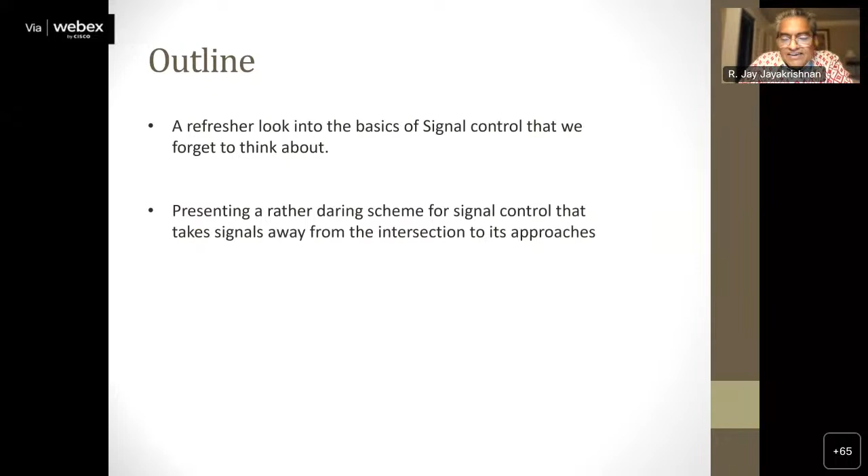Okay, outline. What I wanted to do in this talk was to keep it technical but qualitatively technical. I'm not planning to give too much of quantitative items, formulas, and all of that. In fact, I'll throw some slides at the end, which are slides from Pengyuan, because that's hard work from him. But the ideas behind this is what I am hoping to present.

So basically, I wanted to take a look at how we are doing traffic signal control, how we have been doing it for the past century, and should we actually even change our thinking when it comes to the future, especially knowing that there will be better technology available. In fact, better technology is already available. We have autonomous vehicles as a possibility, even though nobody expects autonomous vehicles will be prevalent on our streets for at least another couple of decades, if not more.

But signal control can be changed with existing technology and some of the technology that is becoming available. Then additional thoughts came to mind. Most of this started when Pengyuan was starting his PhD work, and he was looking at traffic smoothing, green driving, basically bringing vehicles to intersections. And then as he was putting a proposal together, we were having a phone conversation. It was literally a phone conversation during COVID times.

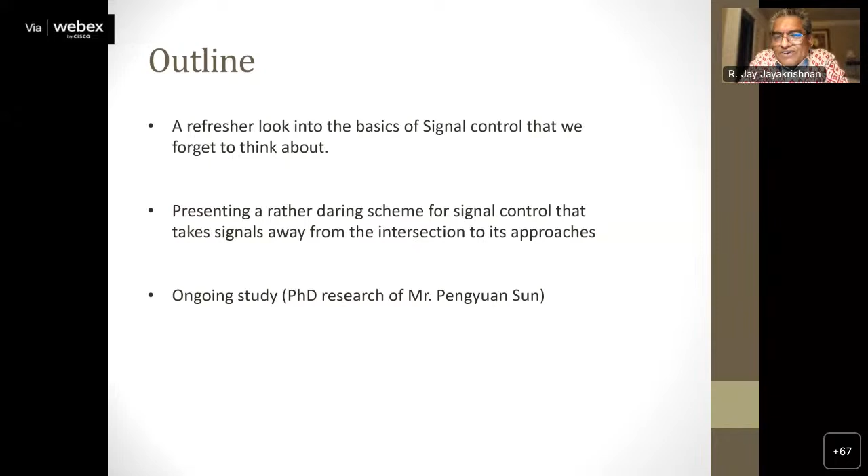And then this idea just struck that, hey, why do we even think of having signals anymore at the intersections? I mean, where should we place these signals? And that's where the research went. Then that kind of forced me to look back at how traffic signal control has evolved and how our thinking has been. So if we go back to the history of traffic control, it was 1868 when they first tried traffic signals in London, and it was a semaphore system.

I'm not sure if all of you remember the semaphore arms that we have on railway tracks. They used to have that. You can actually see the picture where they had these arms that were set up as traffic signals. The first electric signal, of course, came after the electric bulb got invented. The first electric traffic signal was developed by Lester Wire at Salt Lake City, Utah.

And then by 1935, the USA had the first Manual on Uniform Traffic Control Devices. Interestingly, that book's title has not changed even now. It is still the MUTCD that the US has. Of course, it's been updated so many times.

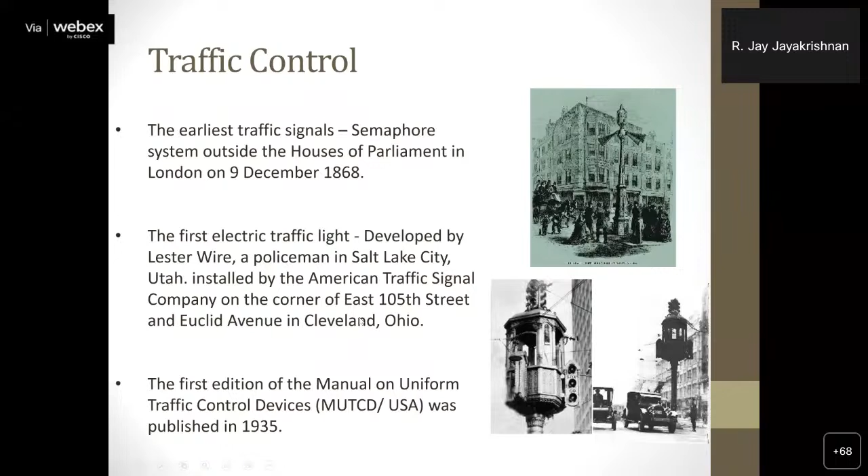You can see some of the earliest traffic control. There was even a little bird cage kind of thing, where a policeman would actually sit inside that little bird cage. And because it was developed by Lester Wire, it used to be called a bird on a wire, or something like that. I don't remember.

And this is 1868 when London first started traffic control. It had some gas lights, etc. They had some big fires and problems of that kind. But you can see the signal: caution, all persons in charge of vehicles and horses are warned to pass the crossing with care. So we've been doing this for quite a long time, 150 plus years.

So what have we been doing? Basically, we have red signals and green signals at intersections, as all of you know. Many of you would have designed them, and almost all of you would have studied it, so I'll just remind you of your class notes. What happens at a traffic signal? We do not allow traffic streams with crossing conflicts to move. That has been our thinking always. We won't let crossing movements happen at an intersection.

Now, you may have seen computer scientists a few years ago doing autonomous vehicle simulations, showing that vehicles can just go through. But they were basically using schemes like random path finding that robots would do, not an optimized scheme where engineers could say, this is how we will design it.

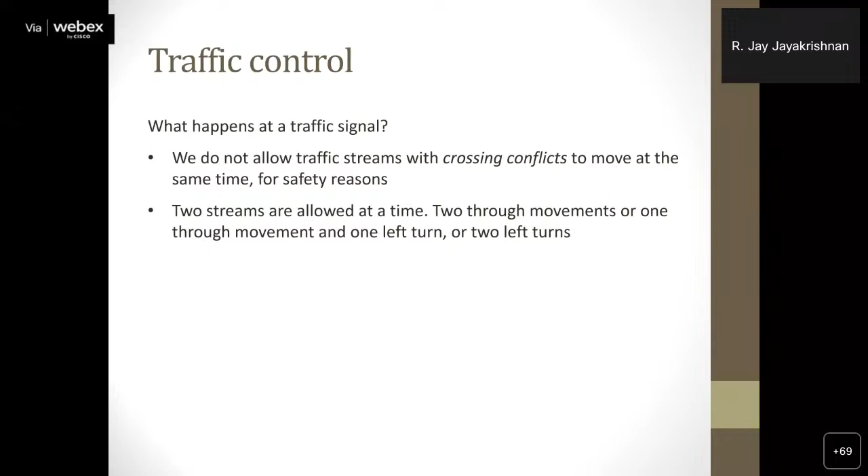Two streams are allowed at a time, two through movements, or one through movement and one left turn. In India, it will be one right turn or two right turns in an 8-phase ring diagram. So some merging flows, right turns in the US or left turns in India, are allowed unless otherwise specified for congestion reasons, not for safety reasons. That is the well-known RTOR in right-hand driving countries, and LTOR, left turn on red, in India. I don't think it is used a whole lot in India, but it's there.

How safe are merging or car following movements in comparison to crossing movements? This is a question that came to mind. We have always lived with the thinking that we can merge without accidents. We have expressways everywhere now, or freeways in the US. Vehicles are coming at 60 miles per hour, 100 or 120 kilometers per hour, and there's an entry ramp, and people easily merge into gaps of probably no more than 3 or 4 car lengths. We never bothered to be scared about that.

Why are we so scared about crossing movements? That is where my thinking went. So we will revisit this question. And one other thing to keep in mind: all of us who have learned driving are constantly keeping safety in car following. We do this constantly, every split second.

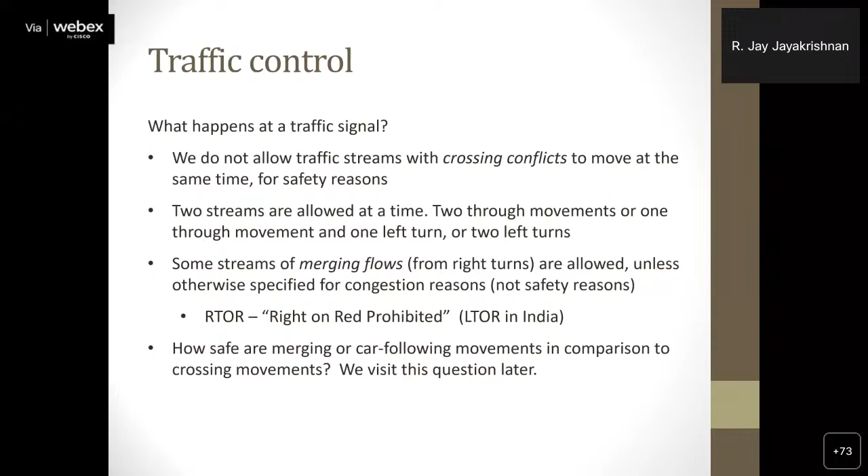This may not be a problem in India. In fact, we see on our national highways that we do know how to cross into traffic. It's not an impossible maneuver. I think human beings can do this, and that's where the thinking went. Let's just step back. What happens at a traffic control?

So it's class notes that all of you would have seen. This was from a talk that I gave to the students. So I borrowed the notes from my colleague, Professor Wenlong Jin, who I consider the foremost expert in traffic flow theory in the world itself. That's just what I have always thought about him. These are just his lecture notes. I used to teach this class, and many of you teach traffic engineering, and many of you have taken the courses, so you would all know this.

There is a queue that forms whenever there is a red light. There's a green phase at the light. There's a red phase, and if you just think about a straight deterministic queue, there's an arrival curve, and then there's a departure curve. The departure curve gets stopped during the red time, so it becomes flat, and then you get the saturation flow. Then they leave. Now the area in between these two curves is the total queue delay that is caused at an intersection. This is well known, right?

So you would have all seen these equations, and I'm sure you know the delay formula that is given there, the well-known Webster's delay equation. And the problem is that when we have all learned traffic engineering, we look at these formulas and we don't really think too much about it. It's like, oh, there was that complicated formula that Webster came up with. There's really nothing too complicated about it. The first term is pretty much what applies for most purposes. The second term is showing the extra delay due to randomness.

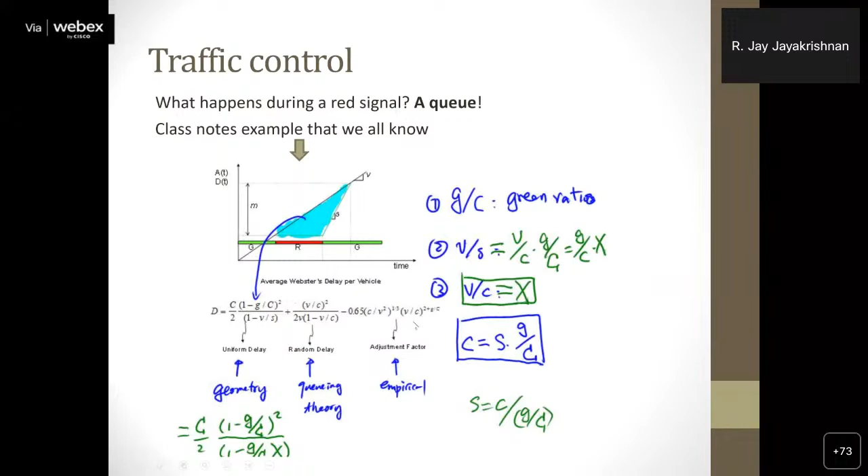If you look at traffic signal settings around the world, and I apologize to the country where I am in, it was mostly taught from the US to all the countries around the world, particularly Asia. Almost everybody seemed to have learned it from the US and UK. And somehow we have never been told that long signal cycles are a bad thing. And we always give the reason that, oh, it is all for pedestrians. That's almost like a convenient excuse.

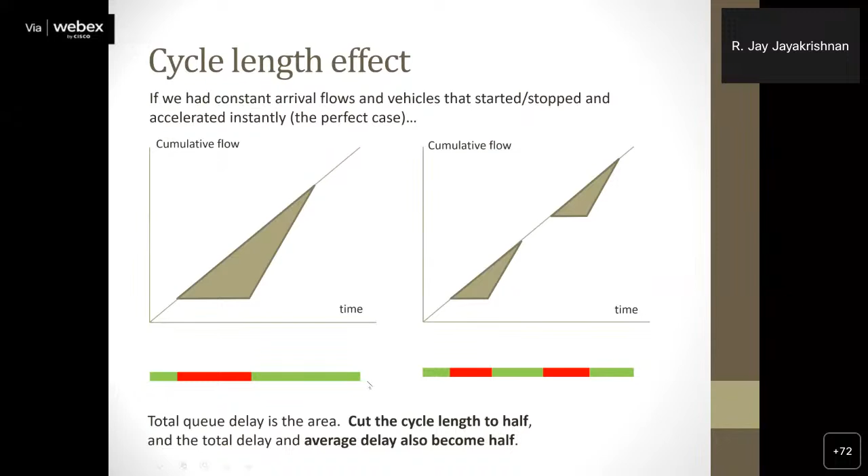But for pedestrians, yeah, we have to give that. No, pedestrians can wait a bit too. You can do it a few cycles at a time. The reason why I say that is because if you are keeping these long cycles, you're basically causing much longer queues than you really need to. So you need to think about it. This has not been much appreciated.

India is not too bad, by the way, in this. When I drive through Kerala, I actually don't see signal cycles which are that terrible. But you know, you go to other places in Asia, try Bangkok or try Seoul. These are all places where you'll see like 4-minute type of cycles. "What are you doing?" is what you would think.

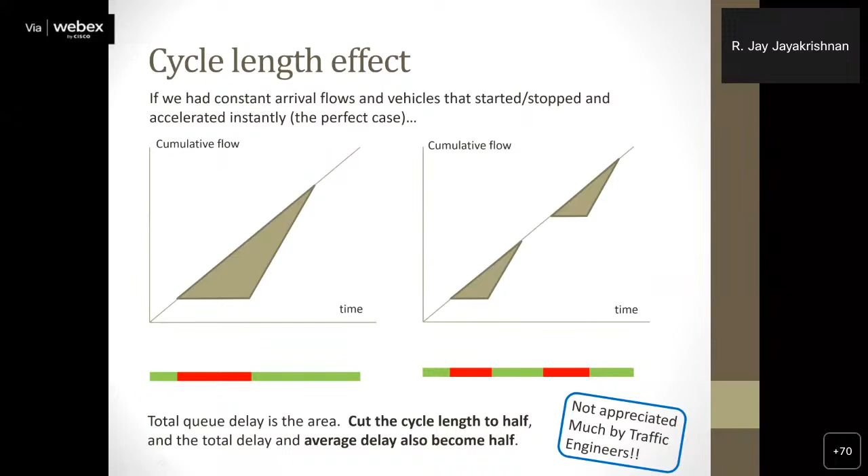In fact, all of those queues are caused by those cycle lengths, nothing else, which is, when you think about it, something we should actually appreciate a little bit more. We need to try to cut the length of our cycles. That's one of the basic points that I wanted to make, and that actually continued the thought. And then, so what happens when the cycle length goes up?

We have this average delay curve, which you may have seen. And if you look at a lot of the textbook discussions, lecture notes, and everything all the way from the 60s and 70s, they have always told us, okay, you might have that minimum delay point, like what Webster's equation might give. But don't worry about it. If, for pedestrian reasons, you need to make it 2 times, go ahead. It's sort of flat out there.

No, it is not flat. Again, we have to actually realize this. This curve is basically asymptotic with respect to a line from the origin on the right side. In other words, it is showing the same behavior that I was showing earlier. If you give twice the cycle length, you will get twice the average delay too. So we need to keep that in mind.

Now, most of you would know that the left side comes down from infinity, and that's because there is lost time. If in every cycle you lose 10, 15 seconds or whatever at a signal, which is just lost time, startup lost time, yellow times, then if the cycle length becomes too small, delay will just go to infinity. So we don't go anywhere near the left side of this anyway. We work on the right side. The problem is we work too far on the right side. And that's something that all of us should think about.

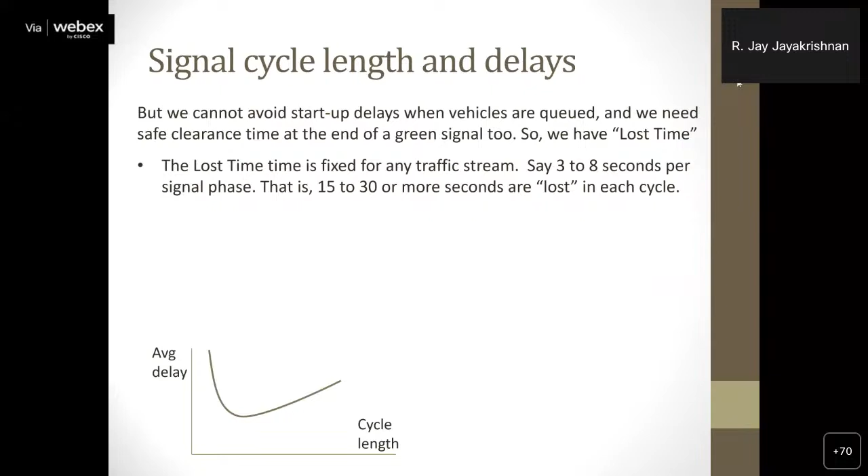In this talk, I wanted to just throw these ideas and thoughts back at you. Some of you may have thought about this. If not, just spend some time thinking about the traffic control that we do. So anyway, we have lost time. The lost time is fixed, as I was saying, 3 to 8 seconds depending on the phases that you have, so anywhere between 15 to 30 seconds could be lost in each cycle. That's a problem with these cycles, which means the only option is to keep it long, and then pedestrians will often give you even more trouble.

Those of you who have worked as traffic engineers, and I haven't, would actually know this pedestrian problem at many intersections, especially in Kerala, when you have a primary street. Kerala is not a grid structure. Almost any of the major thoroughfares that we have, the major highway typically has minor crossings. And if you ever have a signal at a minor crossing, we have to set the red time on the major direction because of the big width that you have for the major direction.

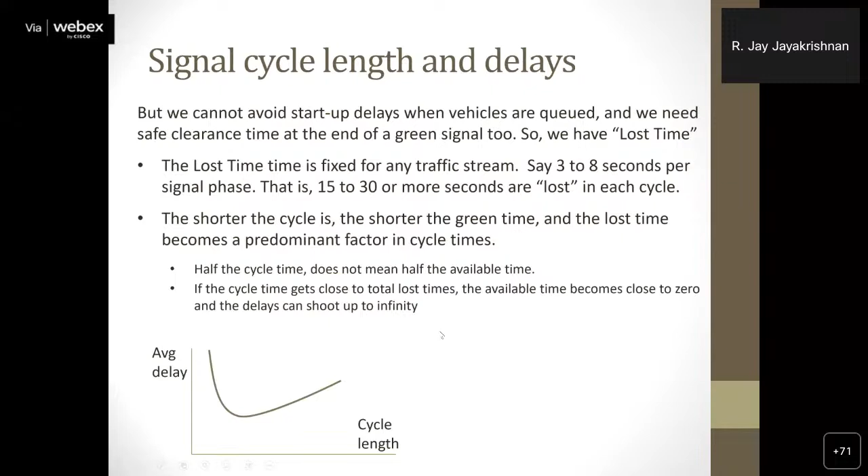So what that ends up doing is, if you have to give 90 seconds of red time to the predominant direction, you will then have to give 200 seconds for the cross direction, which has less traffic, because the green times need to be in the ratio of traffic flows. So these things are just killing us. That is the point that I wanted to make. In the end, we are ending up having these cycle lengths which are really, really long, and that's a problem. Keep that in mind. I've said it probably 5 times already.

Link-based control. How did we think of this link-based control in a perfect world? Let's just go back to the queue diagram that I was showing, which was a perfect world, because the departure curve is like a vehicle comes along a straight line, immediately goes flat, and then immediately goes to saturation flow rate. That's a perfect world. No vehicle stoppage and no lost time. So in that case, what is the best cycle length?

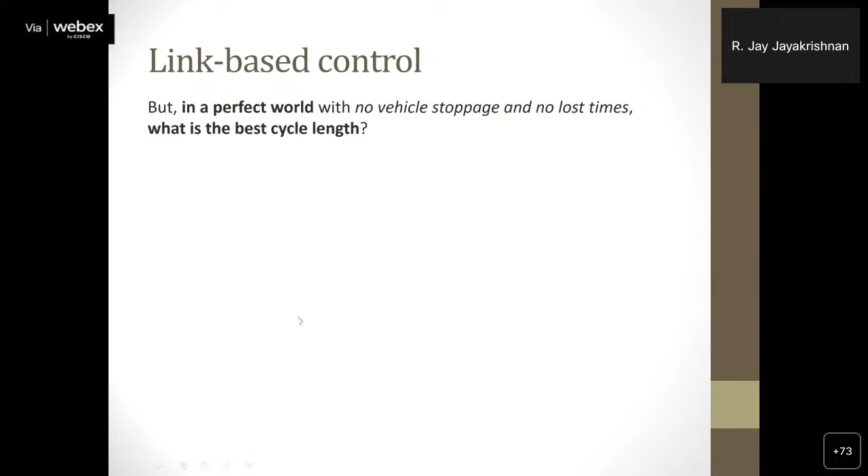I have asked this question in my traffic engineering class to students, and only one student has ever answered that question, which almost surprised me. And he happened to be a Malayali, from Kerala. In fact, Panyan will know, Navjot Sharma from Kollam. He's the only one among my students who has ever answered this question, which has a simple answer: make it as short as possible.

Which is okay. Then what is it? About 1.8 seconds, 2 seconds saturation flow rate. Because keeping it anything less than that doesn't make sense, because cars following each other will typically be no less than 1.8 seconds, more like 2 plus seconds apart from each other. I mean, that's our saturation headways that we have. So that's the minimum green time that we should give.

So if you give a green and then a red for the cross direction, then you need 3.6 seconds total. So with 1.8 in each direction, right? So still it's only half of 3.6 seconds per movement if we assume 50% green split. I'm just talking about a very simple intersection of two one-way streets. One lane, one-way streets, okay? The simplest case that we can all think of. One lane, one-way streets in cross directions.

If we actually give a 50% green split, then we know that it'll be 3.6 seconds and 1.8 seconds for each of those. Still, we won't get any more than 100 vehicles per lane per direction. That's actually pretty good, but it is not much more than what we would get in terms of critical volumes. The total sum of critical volumes at an intersection, which is basically the critical lane volumes in multiple directions, will add up to something no more than 1900 or so, right? So we know the total critical volume will only go to around less than 2000.

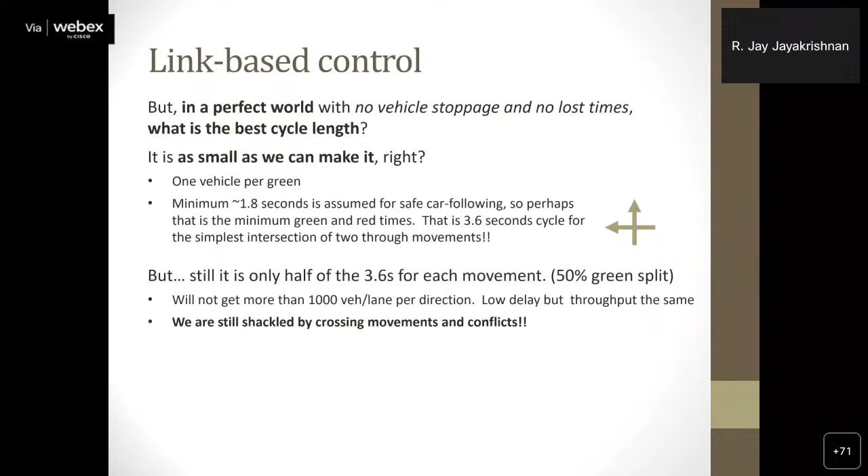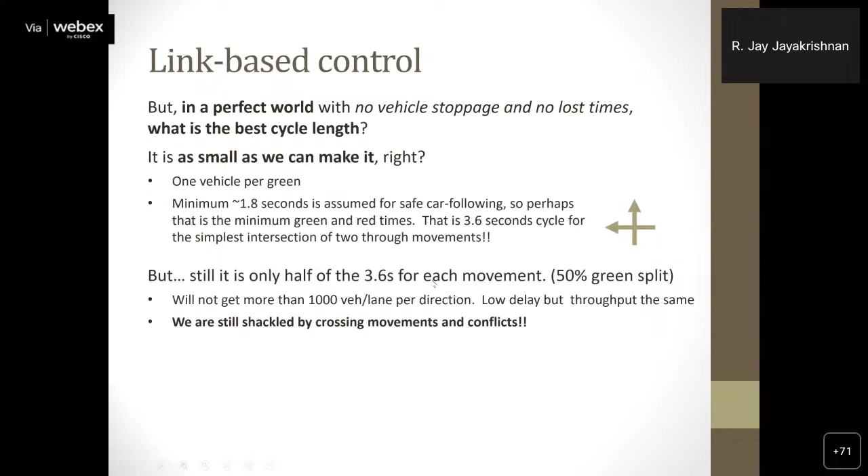But once you adjust it with the capacity manual, now India has a capacity manual. Tom and others have worked a lot on the capacity manual. So if you look at the capacity manual, you'll actually find that the sum of critical volumes typically come down to probably 1300, 1400, no more than 1600. Okay. So the problem is that this worry about crossing movements is just killing us. That is the point. So if we were to think about not stopping at the intersections, like the autonomous vehicle people have been saying.

Did I freeze at your end? No, Professor. Can you hear? Because the video froze. Okay, the video froze at my end, so I was wondering why it was.

Okay, so if you talk to the autonomous vehicle people, I mean the modelers of autonomous vehicle flows from even 7, 8, 10 years ago, they were simulating autonomous vehicles just kind of randomly going through gaps through an intersection.

I'm getting a message here that WebEx meetings is not responding. Shahim, maybe you could send me a WhatsApp if I totally freeze? No, Professor, you can continue. Yeah, I will continue. But if something goes wrong, let me know.

Okay, so the solution for this was, can we actually send one vehicle in both of these directions every 1.8 seconds, and they just go through each other? Do we have enough gaps to do this? If we actually regulate the arrival of the vehicles, we can regulate very easily by keeping a signal upstream on the approaches and release a vehicle every 1.8 seconds. They need to be timed. If there is a gap of 1.8 seconds between two vehicles, then the release of the cross direction vehicle needs to happen somewhere in the middle, so the car can safely go through it.

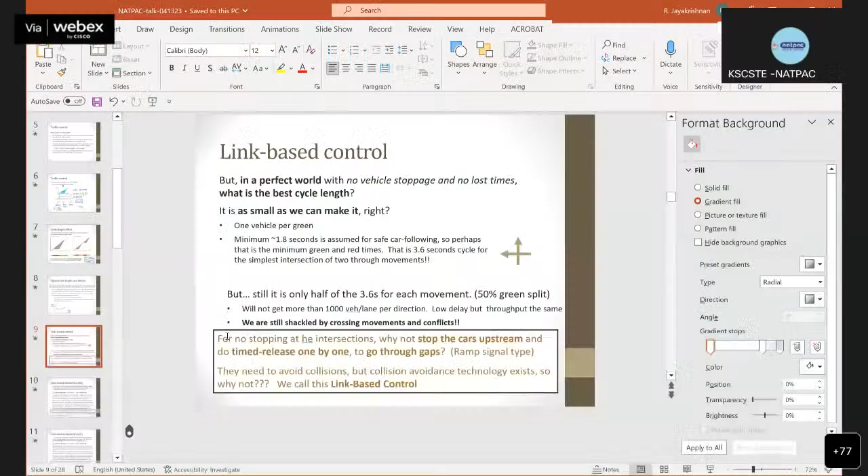Is there any problem there, sir? Okay. So once more we will initiate this. Okay. Some technical problem, will join. All the participants, there is some technical glitch. Sir will be joining soon. Okay. Sir? Hopefully, I'm back. Yeah, okay, sir. You're back. Okay. So let me just go through the explanation that I was saying.

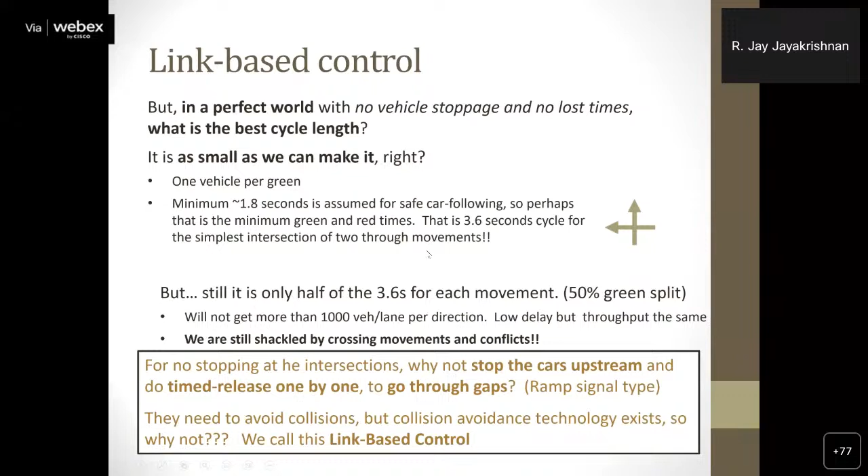So anyway, that's the idea about the link-based control, where we release vehicles. Much more study is needed on this, of course. As the vehicles are released, there are some interesting aspects to this. When the vehicles are released from these mid-block gates, which, I mean, it's not mid-block, they are probably about 100 meters maximum, somewhere between 30 and 60 meters upstream of the intersection would do. So we won't have any signals at the intersection, but we will just simply have a signal which is a flashing green that flashes every 2 seconds or 3 seconds in a timed manner. Okay.

But then what is going to happen is, once a vehicle goes through a gap and gets to the next block beyond the intersection, it may be getting to the flashing green again at the right time, because this actually forces gaps between vehicles that are in a stream. And those gaps will actually continue from intersection to intersection to intersection. So you will be reaching each of these flashing greens when you may not even have to stop. And that's the beauty of it. And we have actually simulated it.

But the real question is, will there be gaps to go through? This is really scary. Everybody will think this is a really scary idea. Simple example, vehicle release every 1.8 seconds. Let's say the speed that we are looking at is about 40 kilometers, which is actually pretty high. The space gap between two successive vehicles is about 40 meters, about 8 car lengths or so. We can easily go through a gap between those cars.

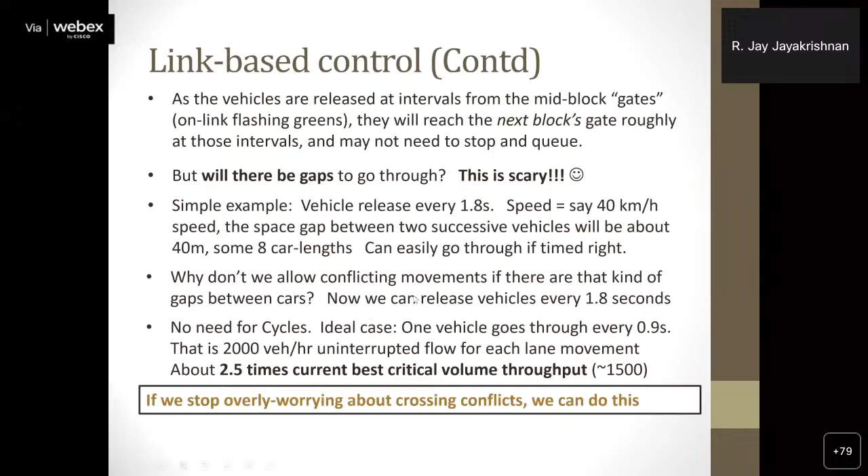You can actually get throughput close to, in fact, 2000 is wrong. It's actually 4000 that you'll get. The current maximum is 1500. I simply made a mistake in the number. It's 4000 vehicles throughput that you can actually get through an intersection with this, which is almost unbelievable. So you have to simulate and see if this is possible. If we stop overly worrying about crossing conflict, we can do this. That is the point. I know this is too ideal.

What about bikes? Okay, that question comes up. Then trucks, autos, pedestrians, cows, chickens, Kerala drivers coming out of beverage shops. All right. Yes, those things are to be studied in field tests.

So this is early. In fact, it's the first presentation that I'm making on this idea to anybody other than students at ITS. The first paper that Penyu and I have written is a short paper, and that has just been sent to TRB at the end of this year. But more elaborate journal papers are coming soon.

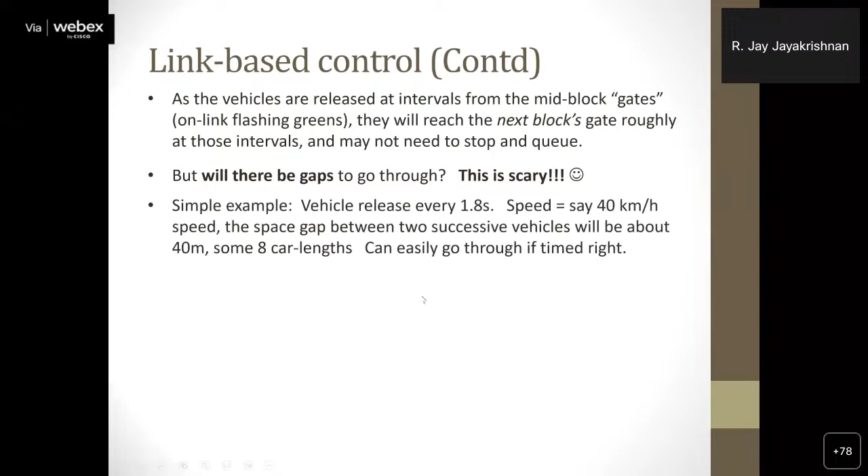But back to the topic. Will there be gaps for these vehicles to go through? We can easily go if we time things right. That was the point. So critical volume, we can get a lot more if we stop worrying. But now the question is, how serious is the accident probability if vehicles are going through this?

Maybe I should show you a little video from Panyu that I wanted to show you. This is an example. I may have to. I don't think you can see a video yet, right? Not yet, sir. Yeah, I think I have to stop sharing and start sharing again, right? Yes. And I have to select that to share. Okay. Can you see the video? Yes, sir. Okay. Can you see the cars going through? Did all of you see the video?

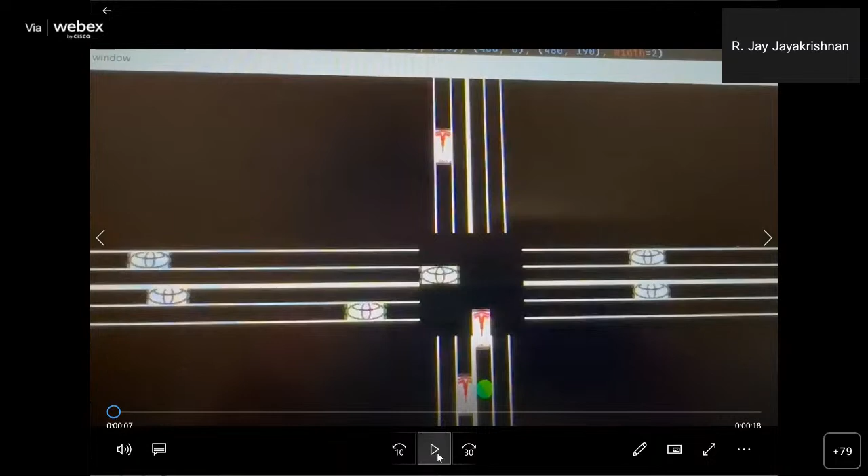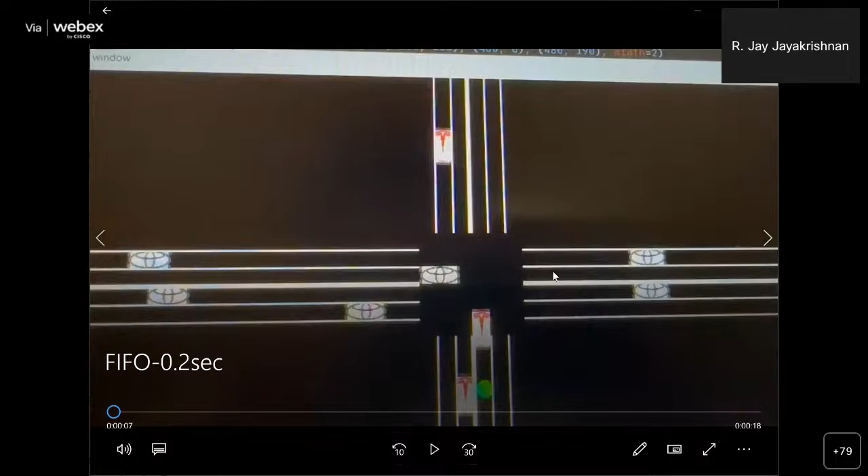Yes, yes. Okay, so let me just go back to make sure you can actually see the distances between the cars. This is a normal situation that Peng Yuan actually simulated using our own simulation model. There's a Tesla and Toyota Corollas, I think, or something. Toyotas and Teslas that are crossing each other.

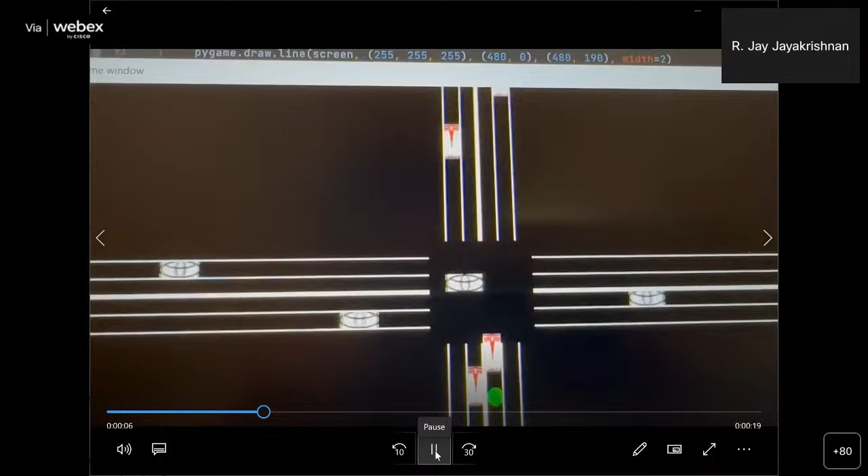These are two-lane traffic. It gets a bit more complicated in the two-lane case. You need to make sure that multiple lanes of traffic actually come somewhat in a timed manner for them to go through. There is a very interesting optimization problem that we have actually solved on this. But I'm not planning to get into the details of that optimization. There is some more.

Now you can see that there's a lot more vehicles that are going through. This will be really scary for people who are driving, but if we know that there is technology assistance also there for collision avoidance, we can actually do this without too much of a problem. Hope all of you can see the vehicle movements.

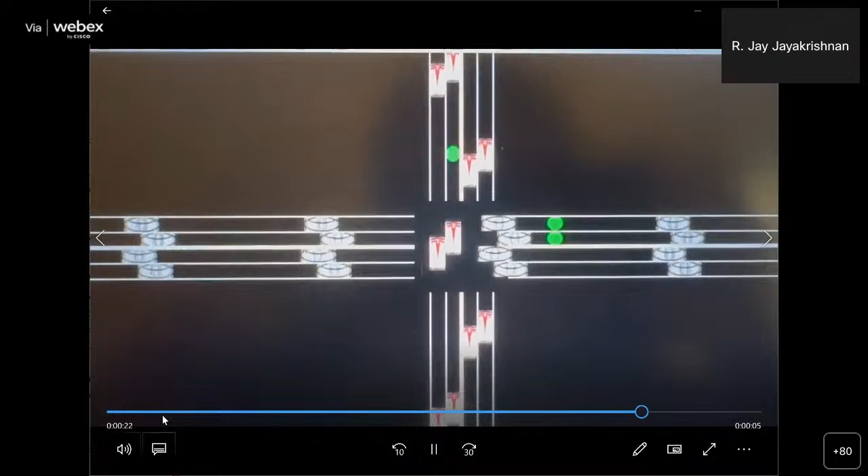And you can see that the vehicles are actually lagged slightly, and that is deliberate also. This is all calculated in terms of how these two vehicles need to be lagged, so that it's taking advantage of the width of the lanes. You go past one vehicle and you come to the next vehicle, and that vehicle needs to be lagged slightly in terms of their release time.

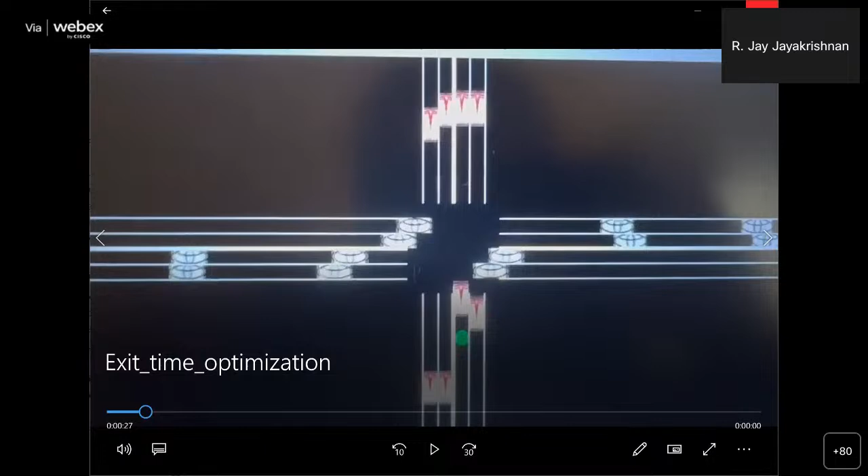So in a way it's a straightforward idea, but it's also, I guess, a drastically different way of driving, and it would probably scare us.

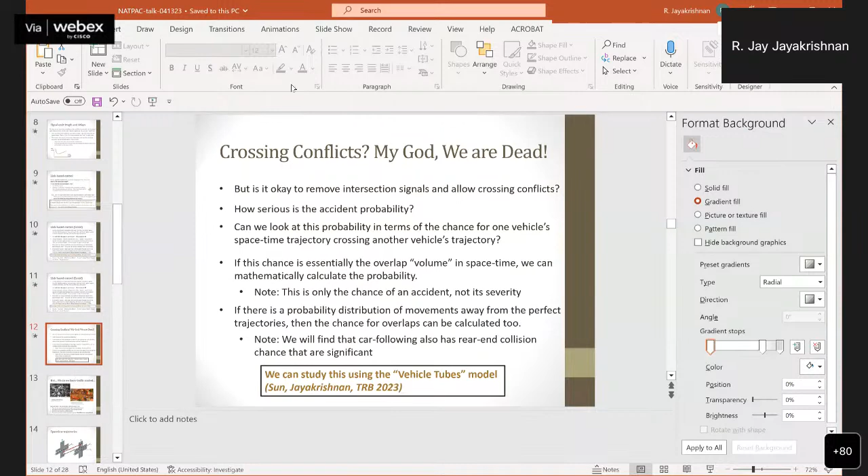My God, we are all dead if we have this kind of conflicts. But as you could see, if we have technology assistance, and you don't need autonomous vehicle technology or anything for this, you just simply need vehicle-to-infrastructure, simple technology of having a device at the intersection, a much cheaper device than having the signal masts and signals and all that, which is extremely expensive. Instead, you can just have a device that transmits the distances of the vehicles. And you could even have a display within the car that actually shows the cross-direction vehicles coming.

And in a level 3, level 4 type of automation situation, the driver could actually have the cooperative cruise control taking over when a vehicle arrives near an intersection. The pedal control will go away from the human to the machine, which is again not a problem. This is fully established, fully verified technology that is available for this. So this is not a problem either.

So now what you have to see is how much of accident probability is there. We studied this, so this was a TRB paper that we published. What we did was to just look at the geometry of vehicles as they move on, and placed around the vehicles a little safety space, a 10 feet type of safety space around the vehicle. So we don't want another vehicle overlapping another crossing vehicle's space. So the probability for accidents is simply the overlap volume of these tubes.

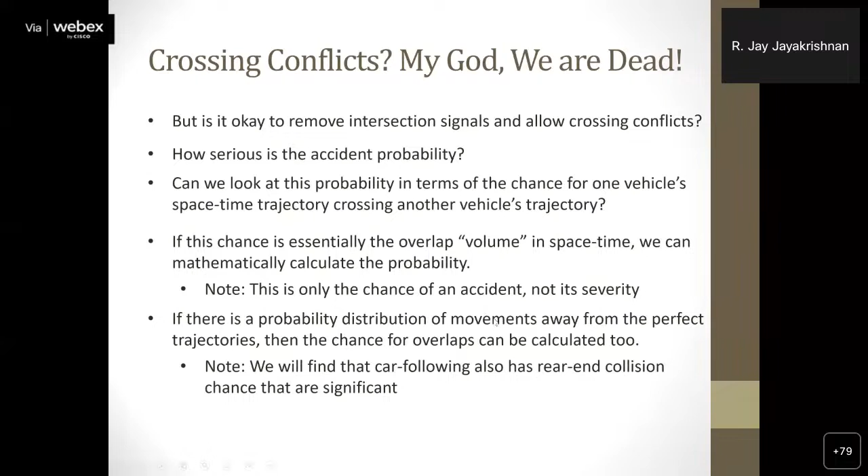That tube is basically your vehicle plus a safety zone around it. And if the zones overlap during the simulation, that indicates probability for an accident in a stochastic simulation environment. So this has been studied. This was a paper that we had this year.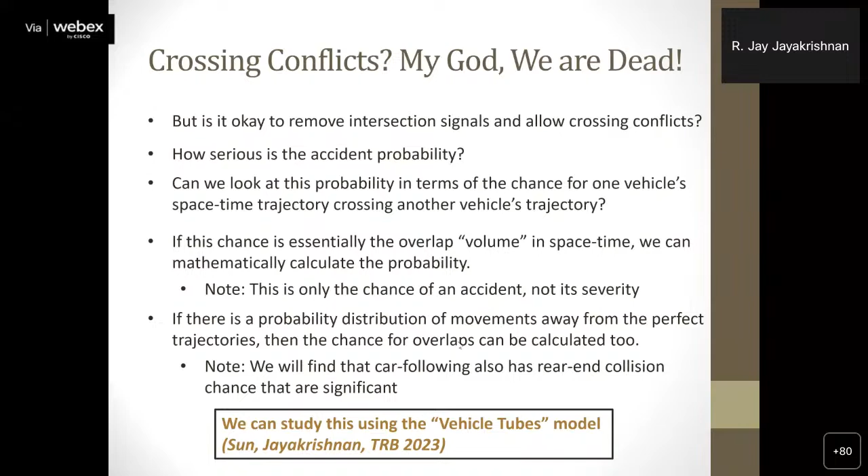And we also established an interesting result: it turns out that there is so much overlap that will happen in car following with rear-end collision possibilities, and human beings are able to handle that. Why can't we handle the crossing conflict, which only exists at one point, not constantly as you are driving? It's just one vehicle, one decision. Should I slow down and wait for that car to go before I go? This is the kind of decision that we actually make in driving, and that is our studies.

This is just for fun, but our first thinking would be, okay, are we advanced enough to do this? Yes. Since my student is from China, I picked an intersection from China, and I picked an intersection that many of you would have seen in Kerala, the Kottarakkara junction, which is a historically problematic junction. And I think this picture was taken during COVID. There is no way there are that few vehicles at the Kottarakkara junction.

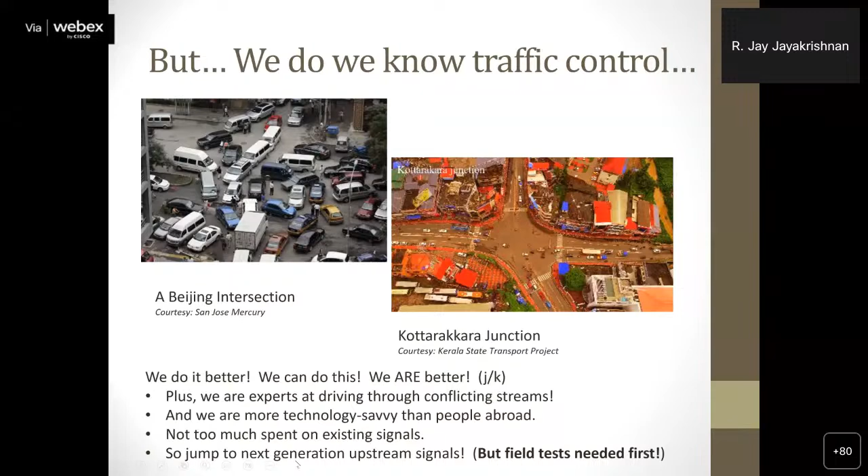But the point is, and Beijing is not that bad. Okay, I'm just showing it for fun. But I don't know how those cars go through. So my point is that we are technology savvy. All of Asia is, and we are ready to do it. I think we should do this, and we should field test these kinds of ideas, which have relevance.

Now I'm going to run through a few slides just to show that there is some analysis behind this. But as I said at first, my interest was not to get into all the equations of it. But these are the vehicle tube model that I was talking about, the time-space cases of merging and diverging and car following type of movements. And you can actually study when two of these trajectories in space overlap with their safety region. The overlap volumes can be used as a surrogate for accident probability.

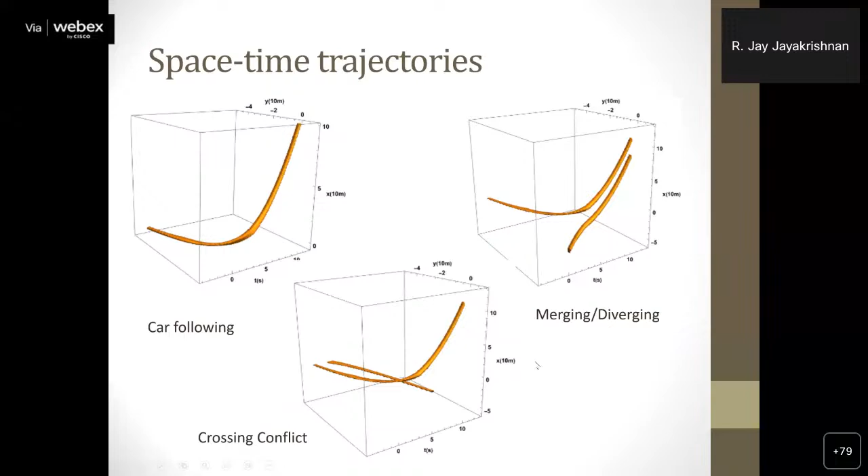So as can be seen from the simulated trajectories, car following actually involves more human decisions and more opportunities for something to go wrong than crossing conflict at intersections. And especially if you have technology assistance, there is just no reason why we shouldn't try it. Minor adjustments while getting into the conflict zone are enough to avoid collisions. I'm talking about basically tapping the brake just to let a vehicle go through. We routinely do this in Kerala driving, at least.

Collision warning systems exist. Onboard devices that show crossing vehicles. If you can imagine a little display that shows the graph, or the network, and just shows in circles or dots what's moving across. You can actually see a car coming because there may not be sight distance to see if there is a gap that exists. It's a no-brainer for autonomous vehicles, of course. Okay. So let's go for link-based control. Is it that the intersection signal must go away? We need freedom. That's what I'm thinking.

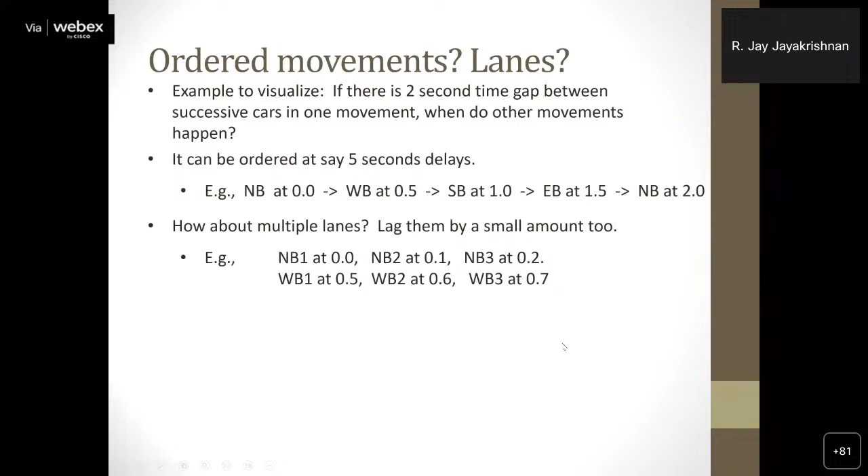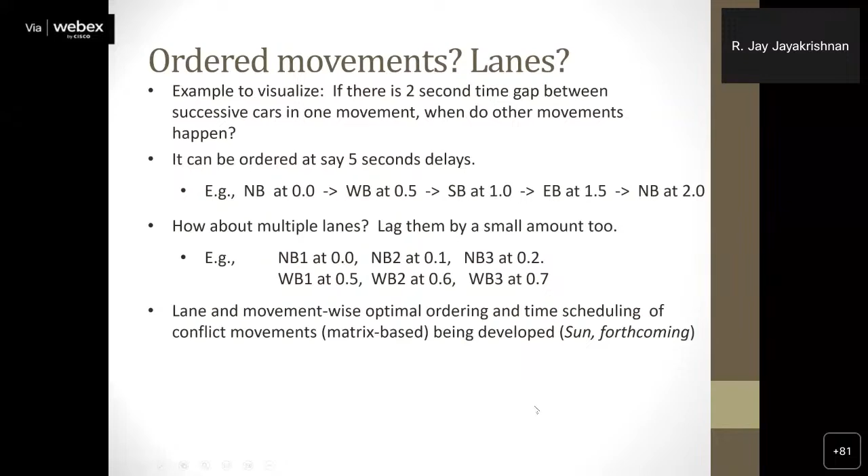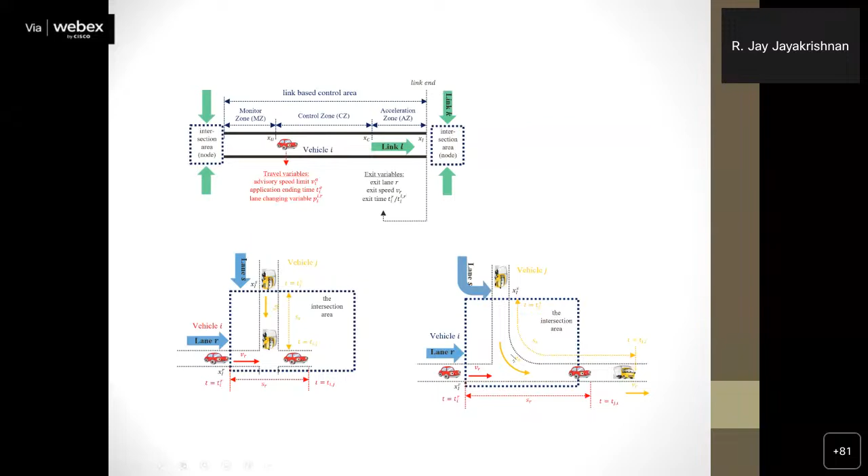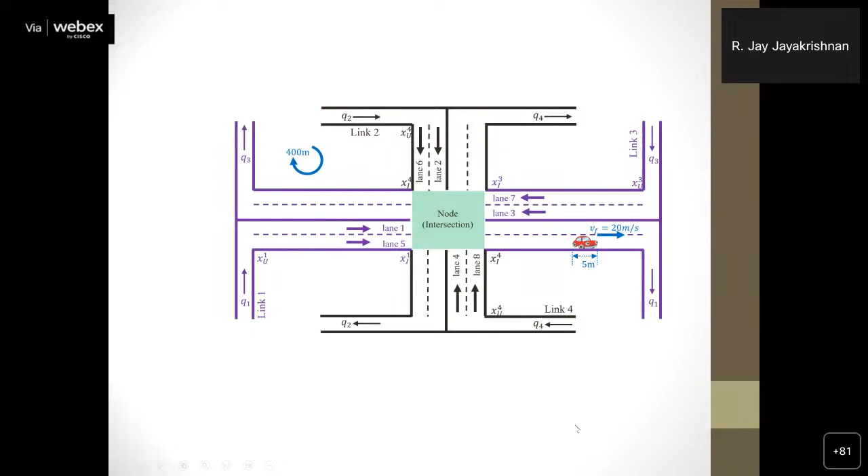Then there is this ordered movement case, and I'll skip this, but know that you actually saw this in the simulation video that you just saw. You need to order these and order lane by lane. You should lag the signal timings appropriately for this to work. And it's again straightforward. There is not much of a problem. You can actually develop a matrix-based optimization scheme for it. So simulations have established feasibility. This is just showing some of Peng-Yuan's slides, since he is also attending. A lot of nice work has been done on the movement vectors, optimization constraints. We studied this sort of a single intersection case. We also studied a case of a sequence of intersections.

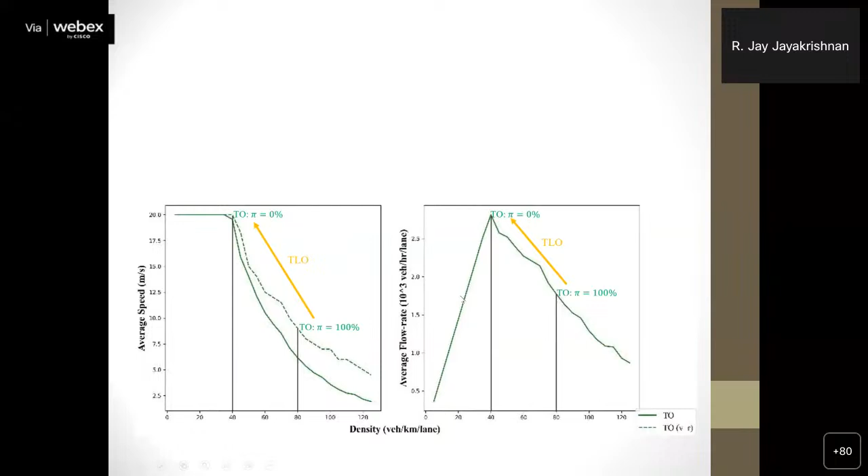Here you can actually see some results that are actually significant. You can see the average flow rate in terms of vehicles. You can see that this is going up to 3,000 in this particular case. That is 3,000 critical per lane volume through an intersection. Once the density goes very, very high, you can't do this, which we know, which is the case with our existing intersections too. We go into oversaturation. So here, the flow rate will drop, and notice that even at 80 vehicles per kilometer, which is very high volume, this is still giving the throughput that we currently get as maximum, which is something around 1,500 or 1,600. Okay, so this works.

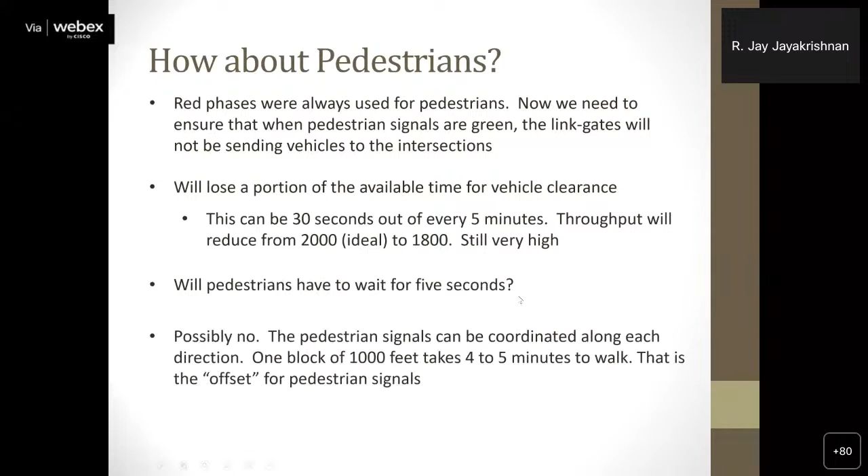There's this question about pedestrians. Now this becomes very, very interesting. We have developed a scheme for pedestrians. Now you will actually need to give some pedestrian signals where every so many minutes you could let the pedestrians cross. But the interesting thing is, along a corridor, if you have coordinated these flashing greens along the way, then the pedestrian walking along the corridor also can be coordinated with it. So that's an interesting problem, but let's skip that idea also. So that is throwing at you something that we are currently working on.

As I said, the safety part of this has been studied in a TRB paper that we published. The whole idea and the initial results from those simulations, I deliberately didn't show here because that's part of a paper under review for the TRG conference in December, where I will show some of the numbers from the latest simulations, which are actually much better than what I was showing. So that's what I have.

I'm just throwing this idea at all of you, and you are the first ones to hear it from Peng-Yuan and I. So please think about it. Maybe at some point we could try a technology demo in Thiruvananthapuram.